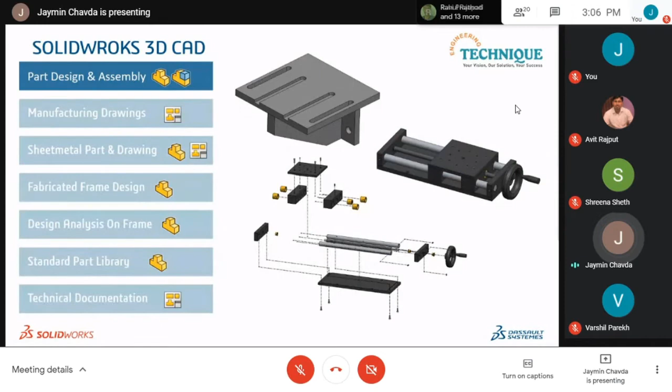So let's start off with the part design first. Let me just show you my model.

Here on my screen, you can see a labeling machine which will be used to put sticker labels on the bottles. Let me show you how it works in an actual environment.

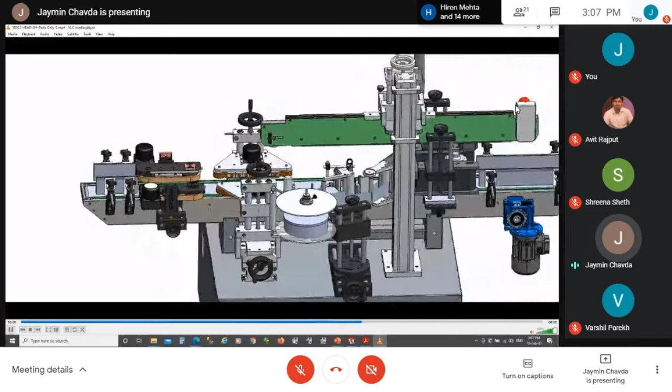This is the animation which I have created using SolidWorks. You can see the bottle enters from one end and exits labeled on the other end, and it's a continuous process.

So yes, we can also create animations using SolidWorks, which we can utilize as marketing material.

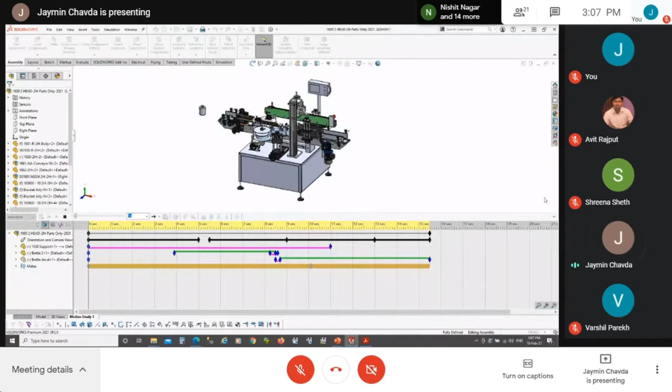So again, I will show you the same thing in my SolidWorks interface.

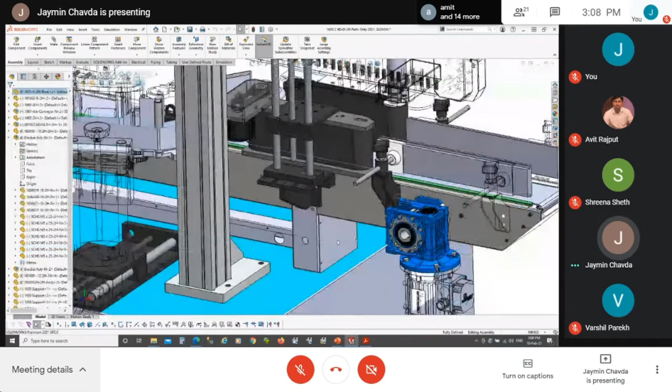Now in this equipment, I'm going to redesign this bracket. Here you can see this bracket has multiple components and it's an assembly file. So what I need to do is make this assembly into a single part, which will be easy to assemble into this equipment.

Let me start off with creating a new component, which I'm going to do in my safe and secure vault. I just need to enter the vault location where I want to create that file, a secure location where we can store every file.

Here I'm going to create a new part file, and with the help of a standard template, I can generate the file number from the code generator. So you can see just like this.

I'm going to design a bracket, opening the same file. Let me just create some geometry over here.

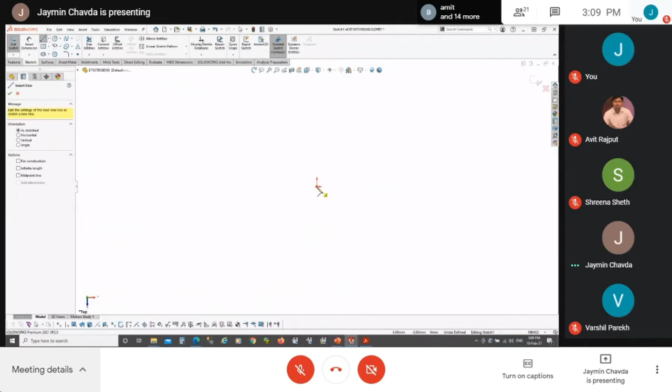I also want to create another sketch geometry on the perpendicular plane. Now I want to create and add the material for the same.

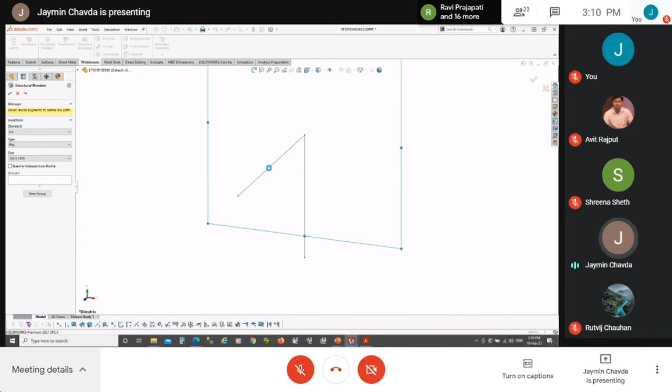Let me just add a plate from my members over here. I select the section I want to create, which is 150 by 10 thickness, and on the other section I want to add a different size of member.

Selecting that, I want to reposition this, so I just change the angle and reposition the things. And that's it, this is how we can create this bracket.

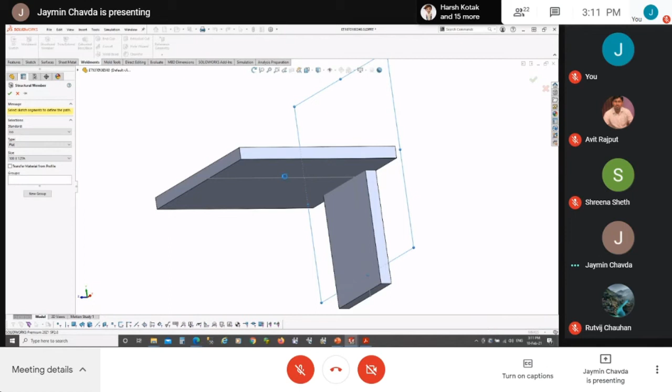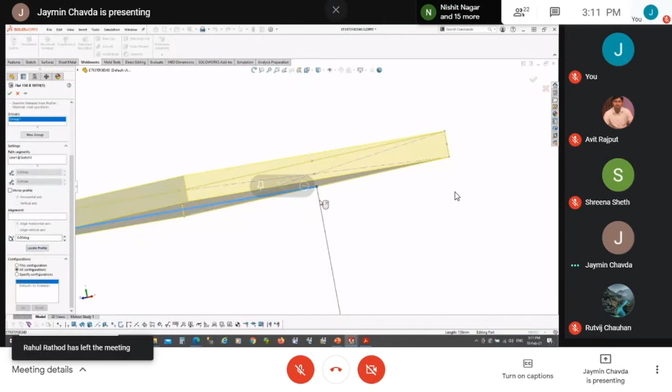One more member I want to add as a gusset. So this is how we can create this bracket component using SolidWorks features.

I want to assemble this bracket into the assembly. Let me just save this and replace that assembly file.

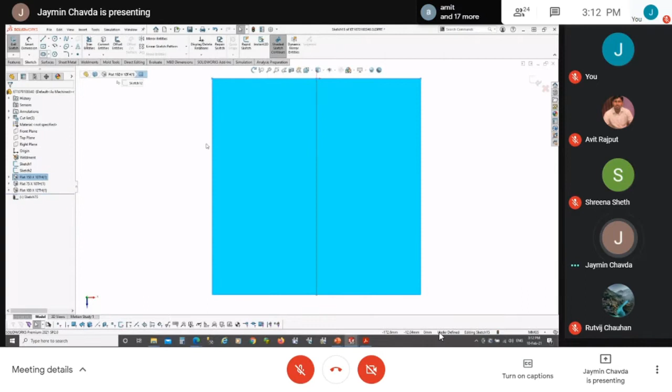But before replacing, I want to create a few more slots over there, as you can see over here. Again, just sketch, and we can use the tools to create that sketch geometry.

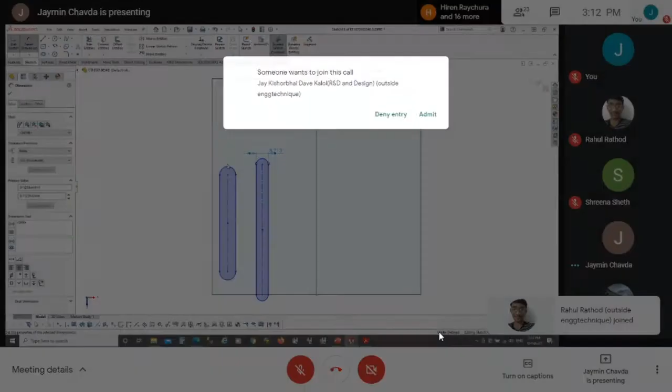Giving dimensions, just adding a few more references. The slot height I required is 80 mm, and this one is having 120 mm.

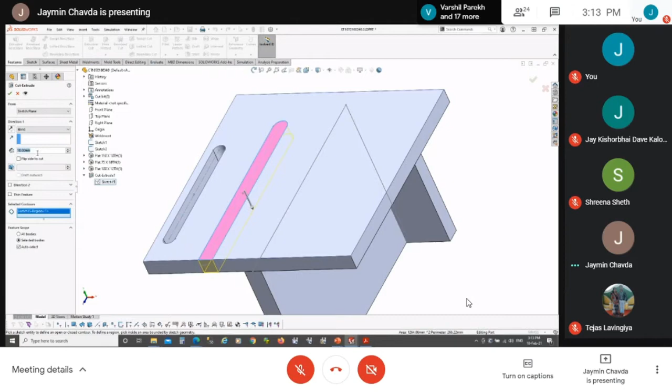Let me just complete this by removing the material from this section, and again removing from this section, and let me just mirror those things.

So it is easy to create a part design in SolidWorks. We just need to create some geometry and add features as we require.

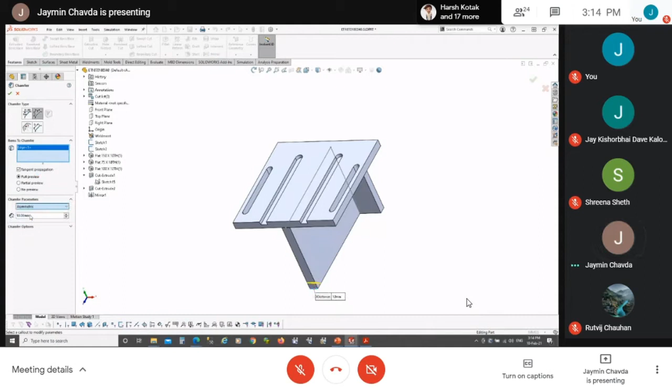Let me just apply a material over here, so if we want to measure the weight, we can easily do it. The weight of this component is around 3.3 kg.

Now I will just save this file and replace this geometry with the existing assembly file. I'm going to replace an assembly file with the part file.

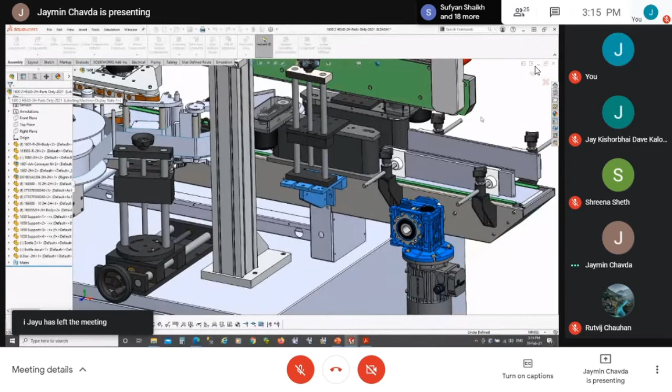A few more hole details I need to add over here. So what I'll do is add that whole part in the assembly mode.

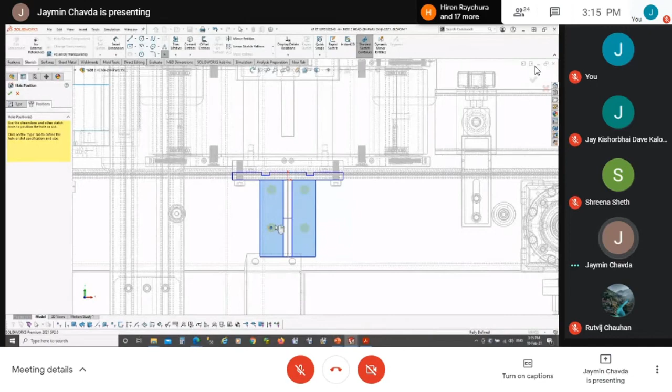So it can give me the reference, whatever the holes are behind that. So directly I can just place the holes and it will update the same.

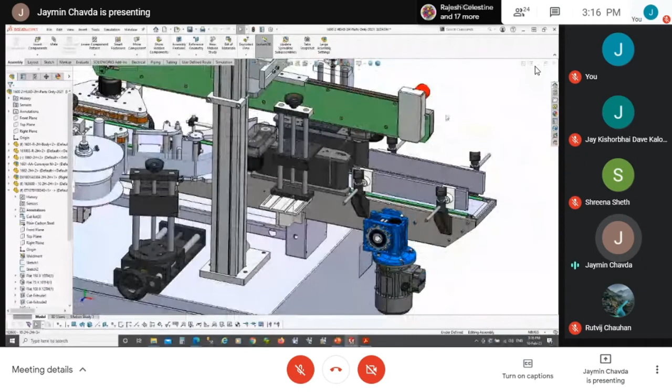Yeah, so this is how we can create the part and add it into the assembly file. Next I want to create that assembly.

This sliding assembly over here, I want to add it on the other end of this equipment. So what I'll do is open a new file, that is an assembly file, and let me just drag and drop the part files from my folders.

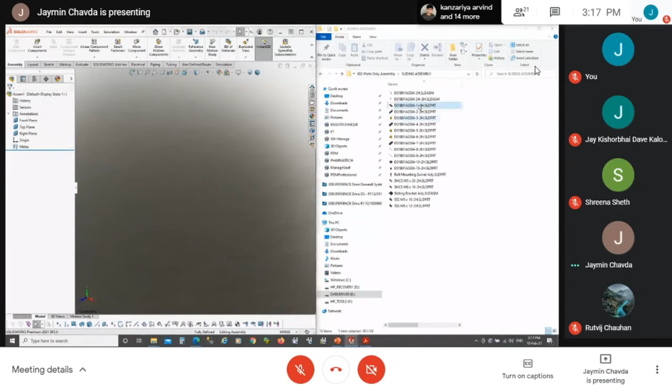Yeah, so just drag and drop to make an assembly file. It's easy to insert the part file directly from your Windows. Just drag and drop and you will have all the files available.

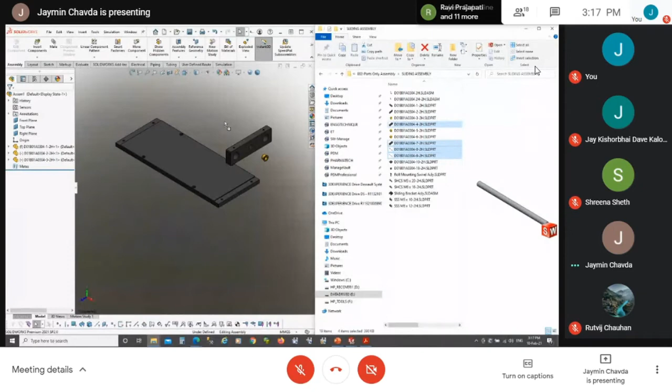Okay, so let me just quickly add the relations with those components. Just select and apply, and it will add the relations between these components easily.

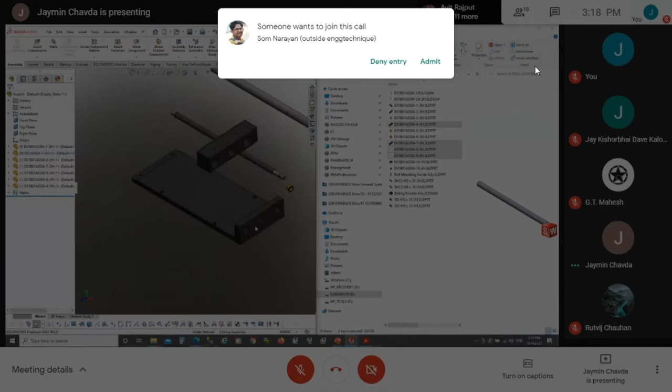So this is a SolidWorks assembly file. We can easily create and add the geometry, coincident and concentric mates with the geometries. There are a lot of shortcuts available in SolidWorks, and using those shortcuts we can easily add the geometry constraints.

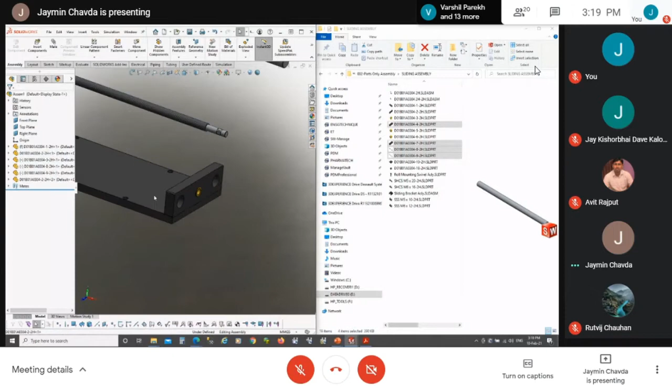Now let me add this bush over here, just adding the respective components.

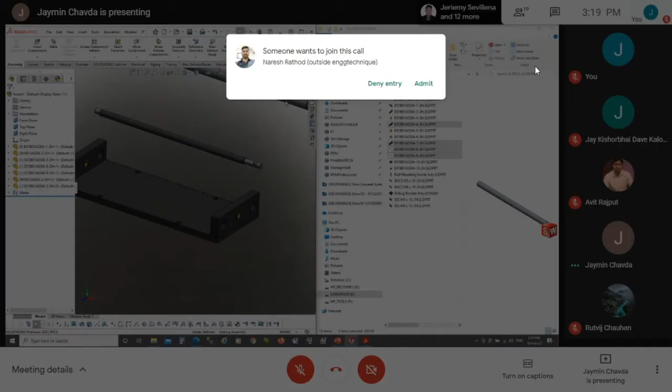Okay, finishing the assembly. So this is how we can create it. One more thing I need to add over here is this sliding attachment.

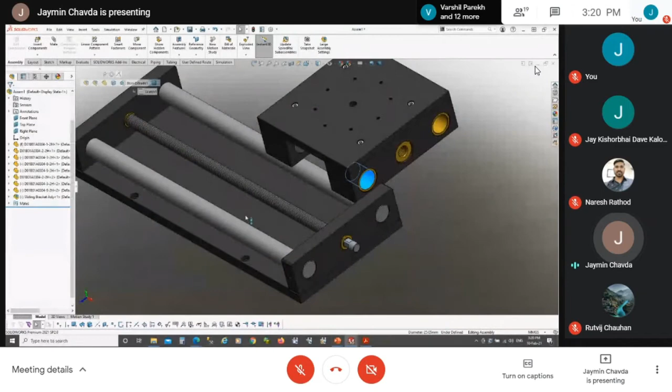So just again drag and drop, and it will apply a smart mate to that components. Yeah, so we have created a part file and an assembly file using SolidWorks. It's easy to create geometries.

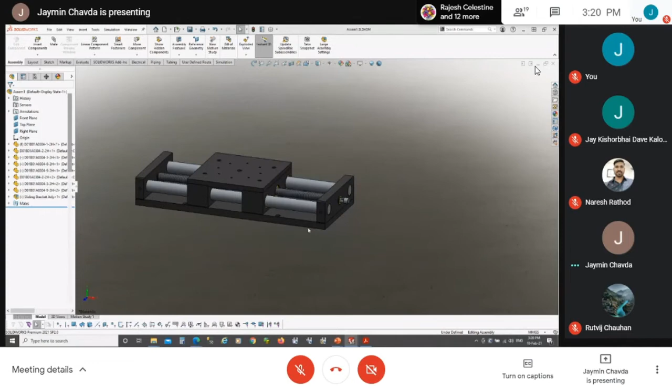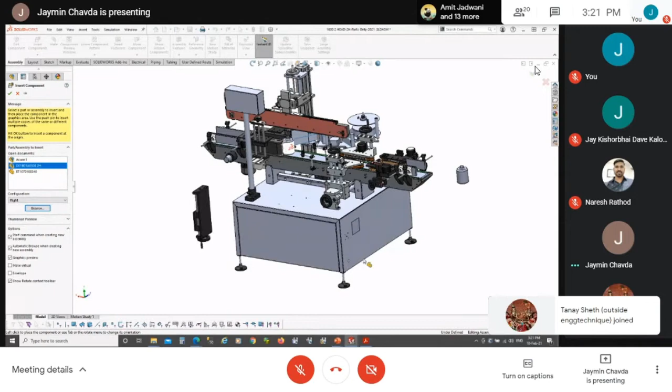Okay, and let me insert that assembly file over here. Yeah, so we have just added this assembly, and let me open this assembly file.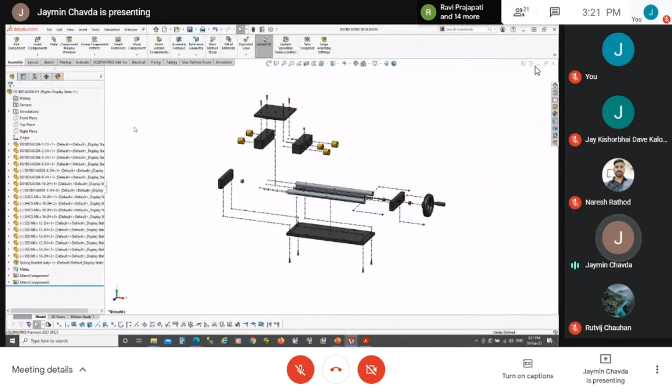So I have created some views, and it is also required to create that exploded view. So this is how we can create the exploded view in SolidWorks.

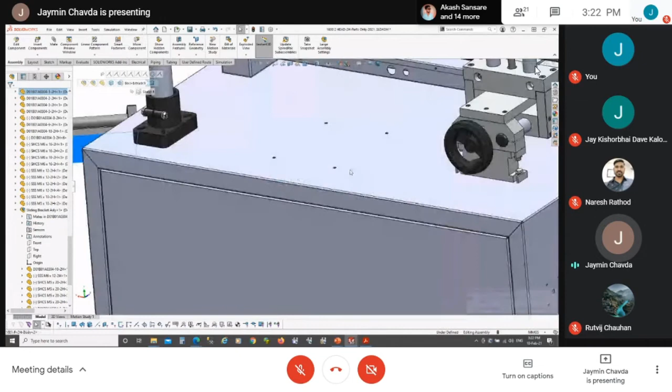Okay, yeah, so let us go with that assembly and add the mates, keep it in the positions.

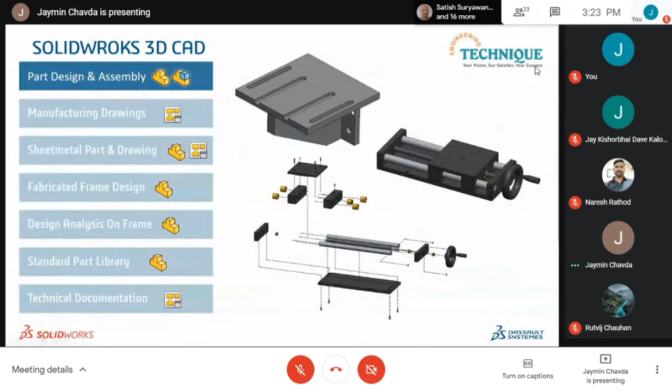So this is how we can create that part as well as the assembly file using SolidWorks. So the next I want to showcase you is the drawing, the manufacturing drawing, how it is easy to create that manufacturing drawing of a part file as well as the assembly file.

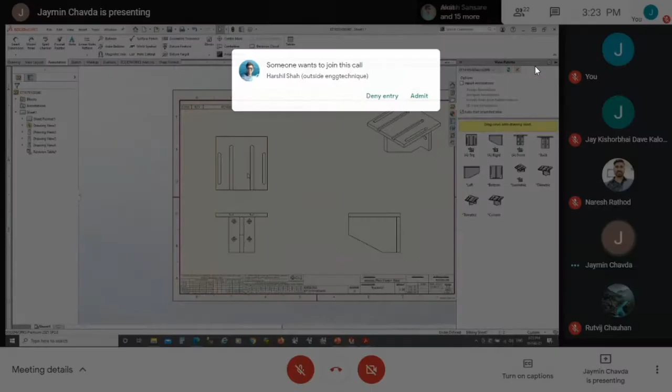Let me just open that file, and I'm going to create that drawing. Using the standard template, it will come up with the predefined views automatically. And it is again very easy to add the bills of material.

So as this is actually the fabricated component, it also requires the cut list and bills of material with that component. So what we do is we will just add the cut list over here with the help of tools available inside SolidWorks. We can easily generate the cut list.

And let me just add the balloons. Yeah, so this is how we can add. And let us add the dimension.

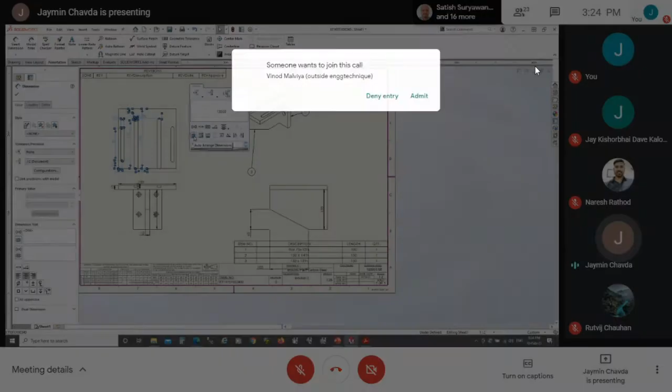So SolidWorks is actually a bidirectional software. So when I say bidirectional, if you are going to make changes in dimension into the drawing file, that will also update your model file as well.

So currently you can see the slot size over here is 120mm. So what I do is I will change this 120mm slot size to 100mm. And let me just update this. So yeah, you can see my drawing has been updated with the size what I have given.

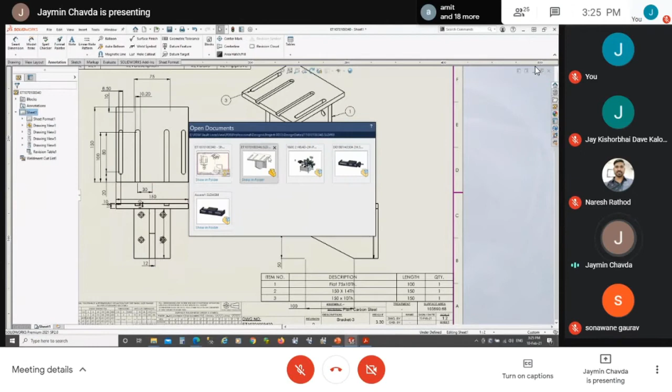And now let us check over here. Yeah, so here you can see if I click on this, I will have the dimension of 100 slot, what we have just changed in the drawing file.

So it is also vice versa, like if I can update these dimensions in my model into the assembly mode, that can also update my drawing as well. So I will make it as 70.

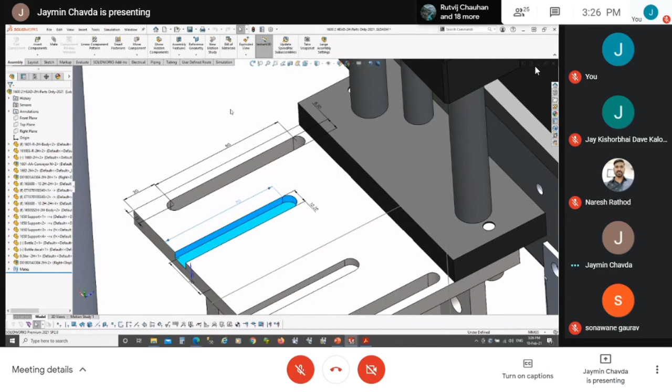Let us see the drawing file. Yeah, so this can be beneficial, like we can easily update, we will all the way get updated with our drawings and models.

Also in the assembly files, we will have updated details and dimensions available, whether that component has been used in assembly or it is individual. So we can have updated drawings available.

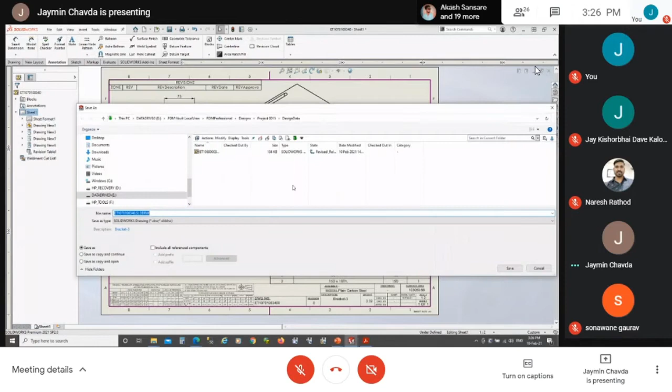Okay, so just again save. And now let me also make the drawing file of that assembly what we have just made, creating a new drawing from that assembly file.

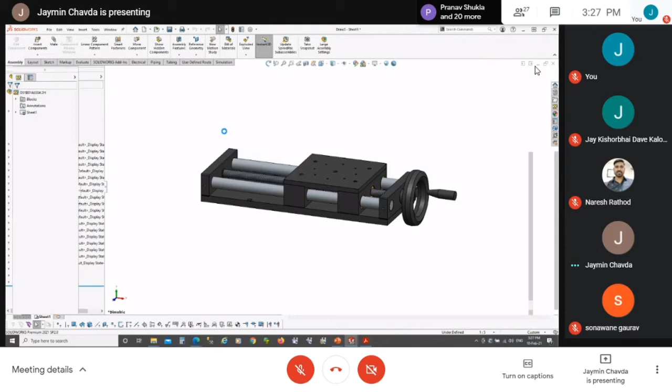Okay, so it is by default come up with the three views as well as the isometric predefined view. But in that assembly file, what I am looking for is exploded view and the bills of material. So I will just remove the other views and make this isometric view as in exploded state.

So which will be very illustrative to easily understand the things, what number of components has been used in this assembly. So we can easily get the bill of material with the quantity and part number and as well as the item number.

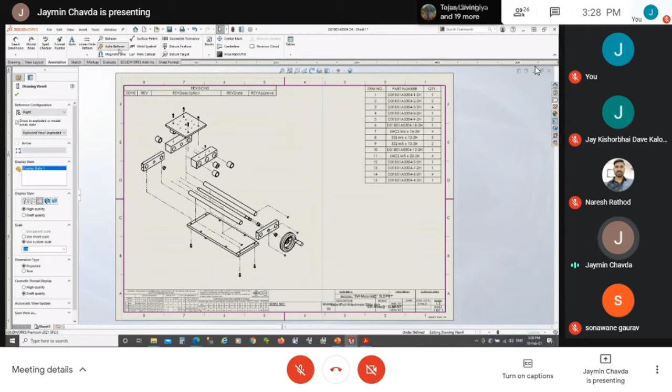So it will also update the balloons automatically. Like currently you can see I have just added that balloons all the way in all my components. But many times what happens, we require a balloon sequence in a different way. We want to rearrange the sequence.

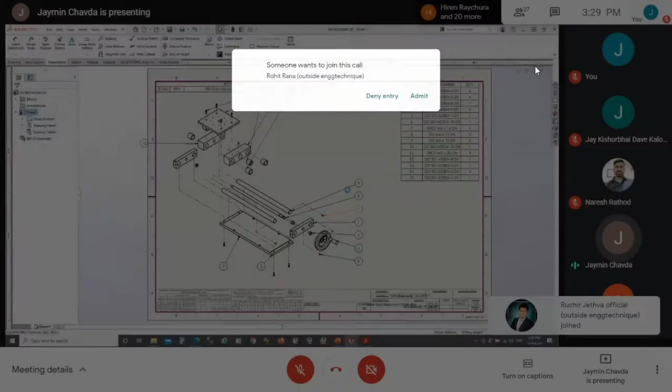So here you can see the plate one, balloon number one is having a plate. So what I do is I want to resequence these plates as number five. So you can see in my bill of material it has updated the part with the five number, as well as the balloon is also updated with the number five digit. So this way we can easily create the balloon drawings with the bills of material using SolidWorks.

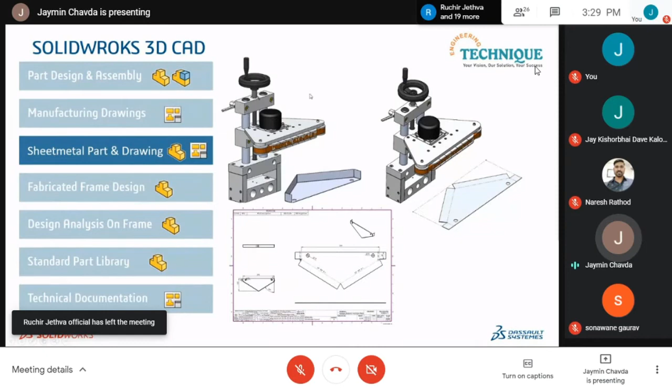We have seen how easy it is to create the part model and assembly model, as well as how to create the drawing file of the part and assembly. Next I am going to show you how easy it is to create the sheet metal model file using SolidWorks in assembly mode. Let us see how it works.

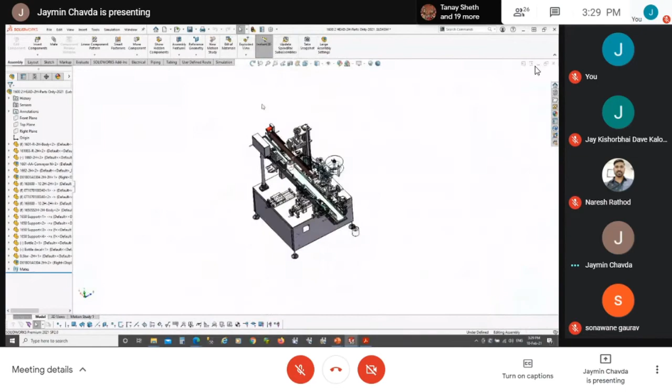Here you can see this is a kind of labeling machine, so it requires a dusting cover for this conveyor belt. What I do is open this assembly file, and in that assembly I need to create a sheet metal cover just below the conveyor belt. So I will isolate this assembly, as I only required to make a cover over here.

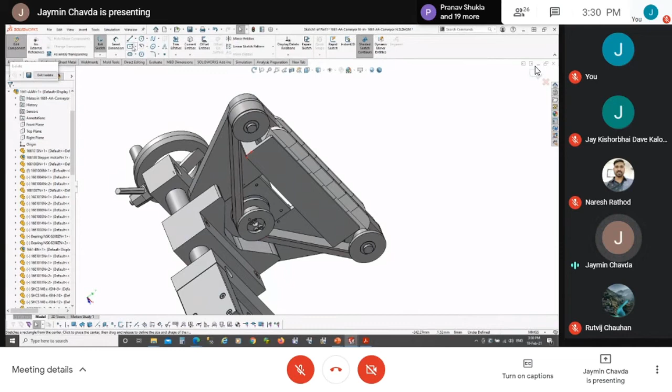Let me also add a new component over here, just creating a sketch geometry using the existing assembly references, and let me add a few relations to complete my sketch.

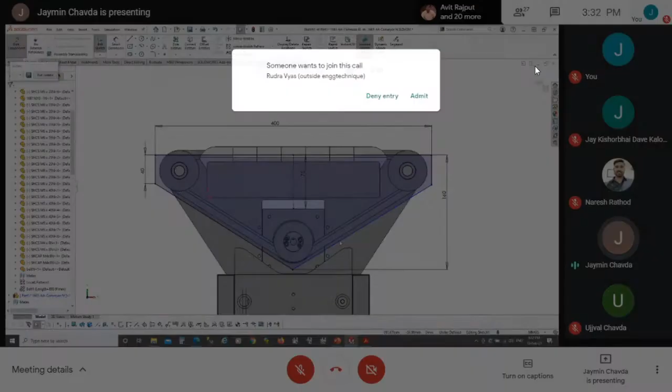Let me add a few dimensions, and make these parallel with that object. The total height is around 160 mm, and this side edge I required 40 mm. So you can see I'm making a sheet metal component using assembly mode.

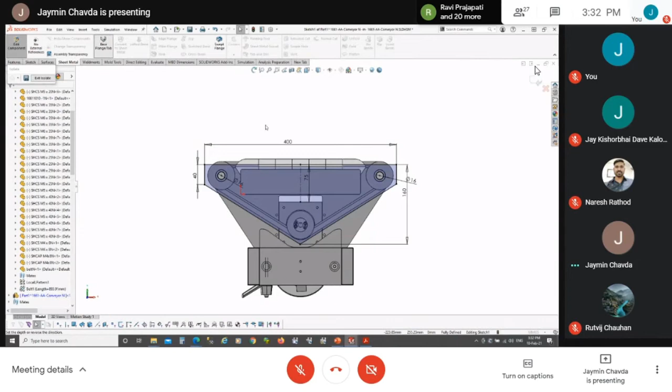Let me add a material with that. I also required to add a few more sketches over here because it's in shaft, so I will give two holes over here with the reference of this roller. And just the base flange I'm going to create with a 1.6 mm thickness of the sheet.

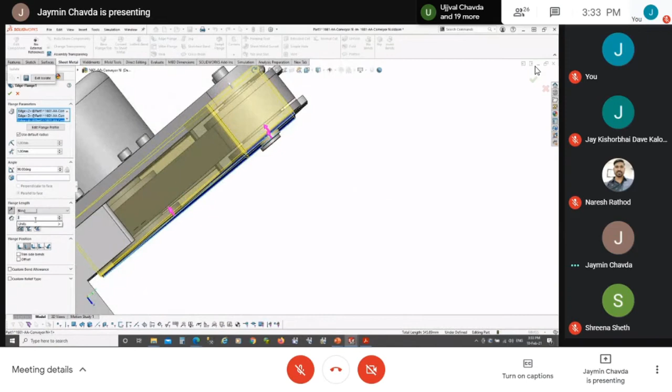This is how we can create it, and I also want to create some side edge so it completely covers my object. I will give it a 40 mm height, and 3 mm height so that will be fine with that cover part, and then closing it.

So at the assembly level, we have just generated this sheet metal cover. I will show you by disconnecting from that cover part.

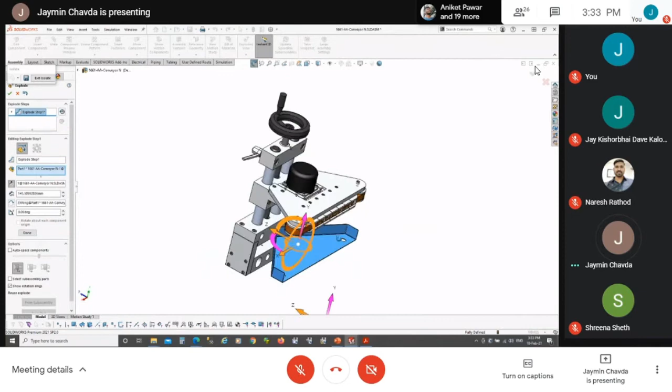Let us create a drawing for that cover as well. For the manufacturing drawing, I will open that part. This is actually the individual part file which we have created in assembly mode. Now I will save and let us create that file.

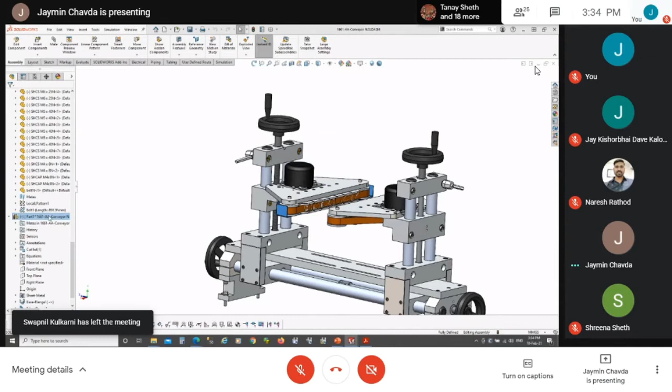I want to save this document first, and I'm going to save it as an external component. Let us make a drawing. It is also important that we have the bend lines available with that component, so it will directly come up with those views.

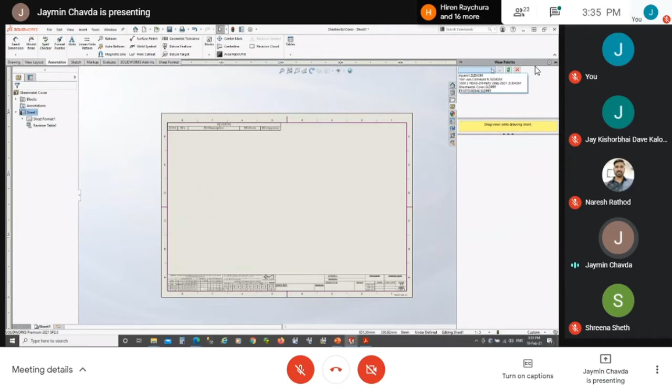So here I have the views of that component available, so I can easily drag and drop to create the drawing file. First of all I require the flat pattern, for the laser cutting or water jet cutting needed to manufacture this component.

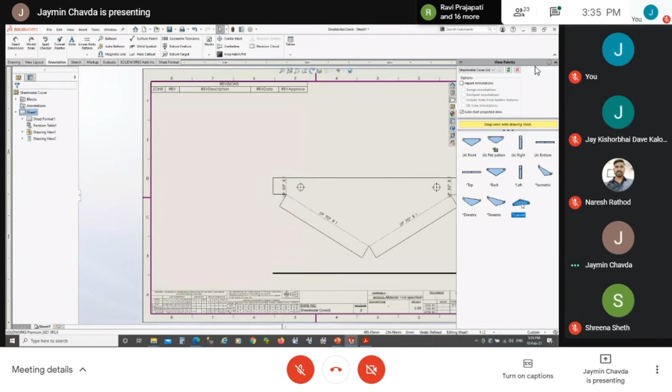Then I will bring down the isometric view as well as the front view and the top view. Let me just scale down so it properly fits into my sheet.

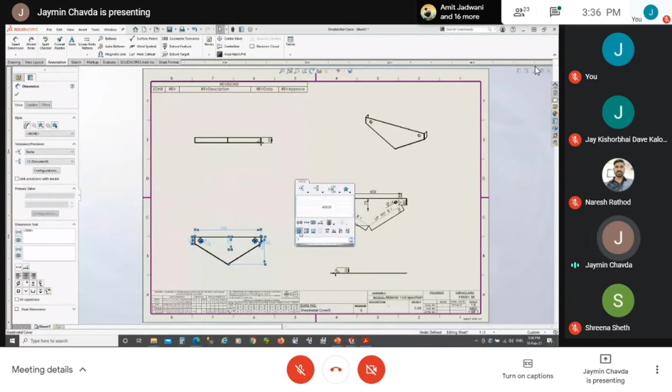Let us add the dimensions. So this is how we can easily create that sheet metal component using SolidWorks in assembly mode. Again, just save this component.

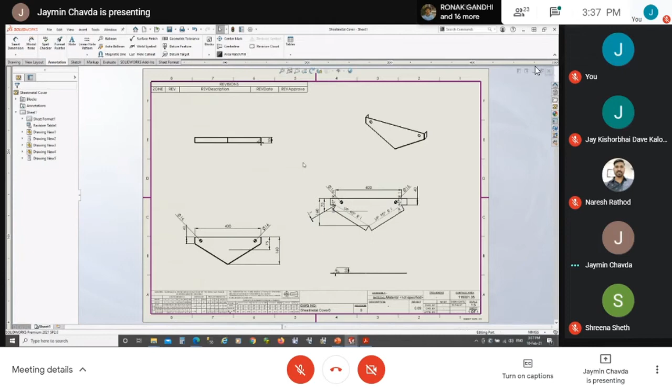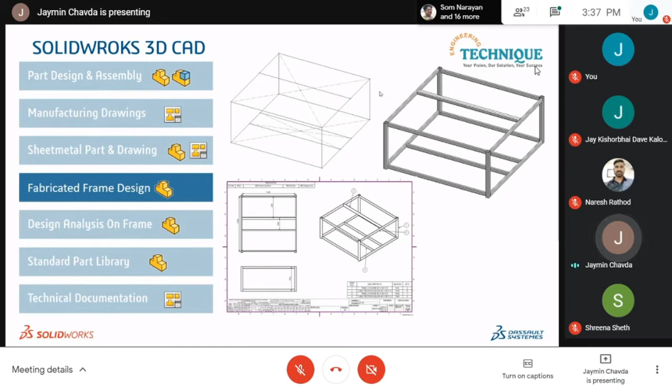So we have seen that it's easy to create that sheet metal part. Now let us move to the next demo, the frame structure design. Many companies work with structural design, needing to manufacture frame structures for their equipment, as well as for manufacturing equipment and machines where the structure part is more usable. Let us see how easily you can create and use structural components with the help of SolidWorks.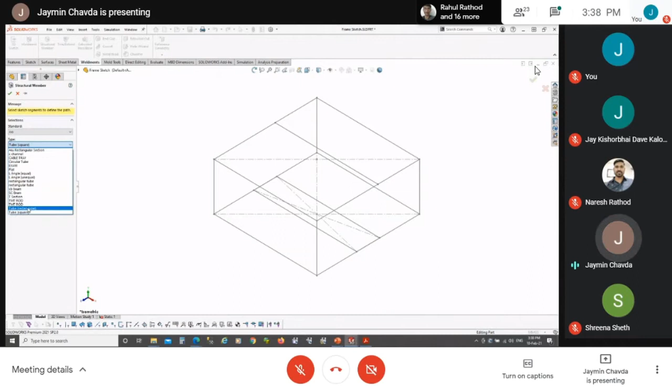So here I have this frame sketch already created, and let me create and add a member. In SolidWorks we have a standardized library available, and with the help of that library you can browse through multiple sections, like a C channel, circular tubes, L angle, rectangular tube, as well as square tube. It's a totally customizable library where we can browse the data and add the members to the desired sketch.

So I just need to select the sketch where I need to add the members, and it will update the same.

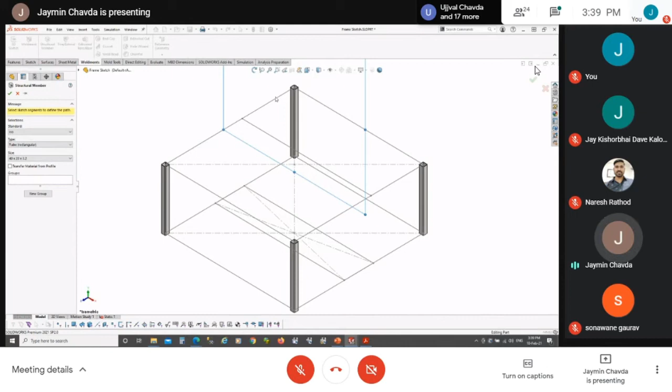This time I have selected the 40 by 40, and now I want to create the member having a different size, like 40 by 20. We can also manipulate the end point and end position of that section. Currently it has been generated from the center of that geometry, but I required it as a corner of that geometry.

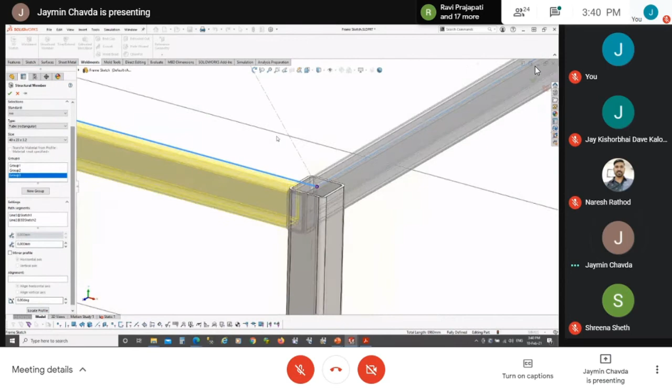So we can manipulate this section. You just select this section and update it as per the desired location easily, and reposition the locations.

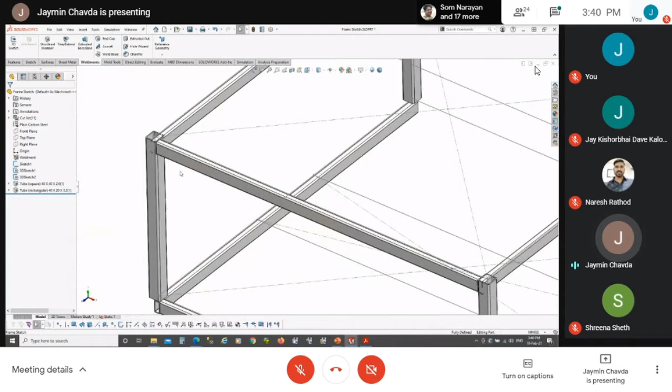One more thing you'll notice is it will fall into that section tube, so we can easily remove the unnecessary entity by just selecting the members. We can remove it, and that's fine.

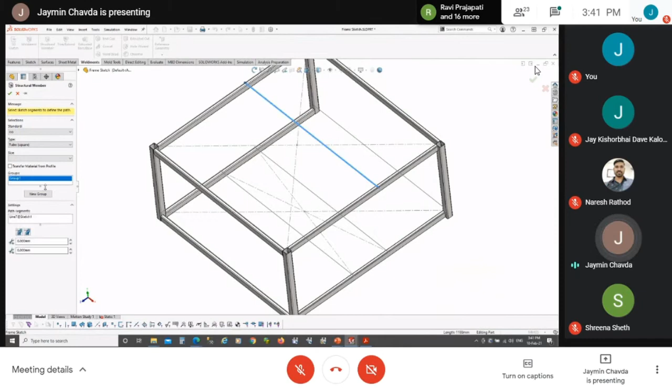For this kind of structure design, it is also important to get the bills of materials quickly. In SolidWorks, it will automatically create the balloons and bills of material for this kind of components.

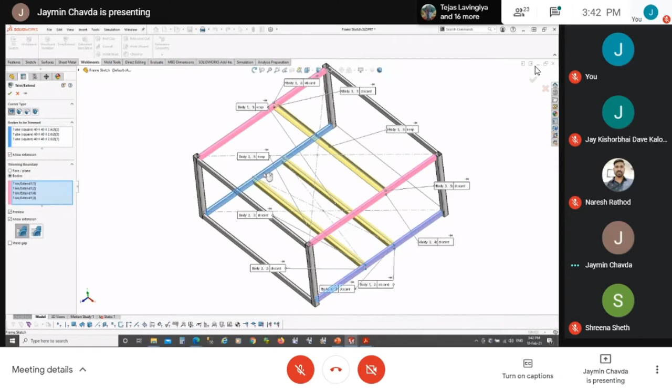A few more members I need to add over here, and let us again just trim the sections. Let us save that component and make a drawing. We are just creating that frame structure within 5 to 10 minutes, including the bills of materials and drawing. It's easy to use and utilize those kind of tools, and we can easily create that structure part as well.

Let us add the bills of material. I need to update in my component. Just a second. Yeah, it has generated the cut list. Let me just...

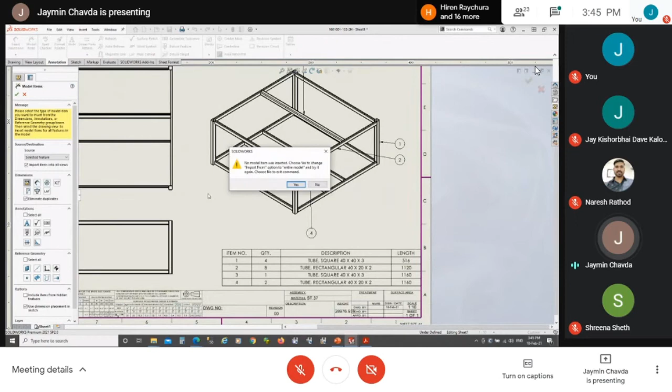It is a kind of concurrent updation for that kind of weldment structure, so if I make any changes into my model or drawing dimensions, that can also update my bills of material. Currently this is having a dimension of 516, and the bill of material is also having a 516 dimension. So I will give it as 600, and let us update the file. You can see my drawing file has been updated with the 600 dimension, as well as the bill of material is also updated with the same dimension.

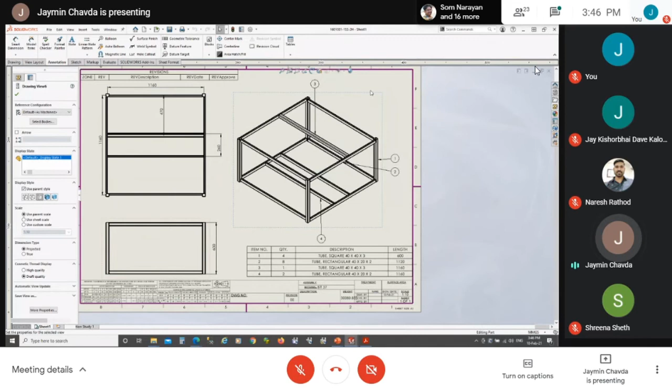This is how we can generate the structure members using that SolidWorks part. On the same file, I am going to perform some analysis. SolidWorks is not just a CAD software; we can also perform simulation, stress analysis, static analysis, and dynamic analysis using SolidWorks simulation. Let us see how we can create that analysis in SolidWorks.

Here I'm just going to add the static simulation. I actually want to measure the load factor, what is going to come on this frame, and the load bearing capacity for this frame. So I am making a fixed geometry of these four corners and applying a load to those members.

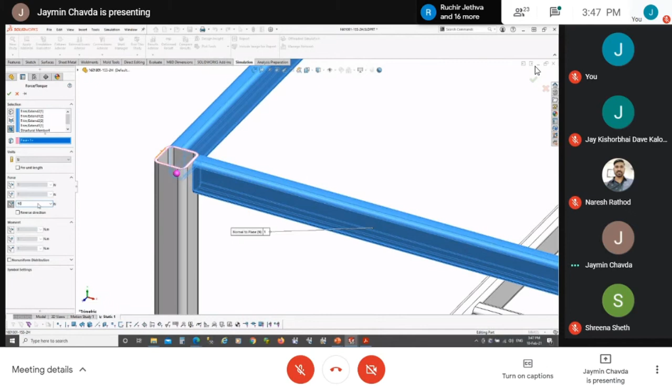Normal to this direction, I will apply 5,000 Newton of load, which is round about 500 kg. Again, I want to update the material as plain carbon steel, and let me update all the components, and let us run the study.

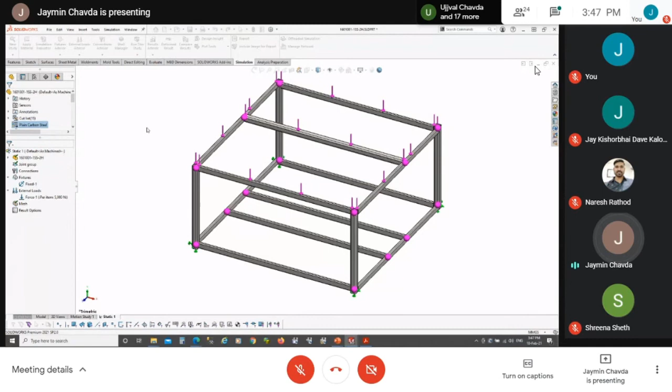The next part I want to show you is the standard part library available in SolidWorks. Using that library, we can generate standard components like nuts, bolts, bearings, which we use in our day to day activities. Let me show you how we can generate that kind of standard component, as well as store electric motors and gearboxes in our design library. I will save these and close.